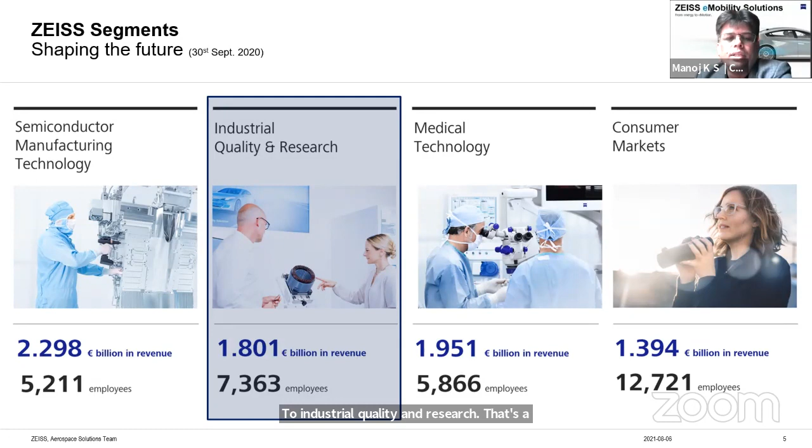We both, me and Hemanth, and this discussion belongs to industrial quality and research. That's the vertical we represent. So industry and quality, and also research. So these are the three topics.

Yeah Hemanth, would you like to comment on this? Basically, industry quality and research is the division where we belong to, and we are subsegmented into industry quality solutions, and then we have a research microscopy solution. So we belong to IQS, and here in industry quality solution, the product we handle basically belongs to contact and optical measurements. That's how we classify them.

Computer tomography, which is basically X-ray based. And once we do the measurement, we do a complete analysis, and also we manage the complete data. So this is the product line we handle from industry quality solutions. And from RMS, that is research microscopy solutions, we provide products like light microscopy, scanning microscopy, electron and ion microscopy, as well as X-ray microscopy. So these are the product lines the other division handles.

But from industry quality solutions, we have good connects with the industry. So some of the products like the light microscopes or the electron microscope, we also combine, and we sell as a complete package to the industry, right from CMM to the industrial microscopy solution. That's the product range we have.

Hemanth, would you like to share what all we do in this office? Yeah, of course, this office here is a building. We have a couple of production facilities. One is for IQS, where we manufacture CMMs, and we also have a production facility for consumer lenses. So all the optical shops in the market that you see with a Zeiss logo get their consumer lenses from this particular production facility. We supply to all of India as well as to the global market. The machines produced here from IQS, the CMM products, are for domestic use as well as export - we export to 23 countries from here. So this is a brief about the facility we have in Bangalore, and of course the headquarter function happens from Bangalore.

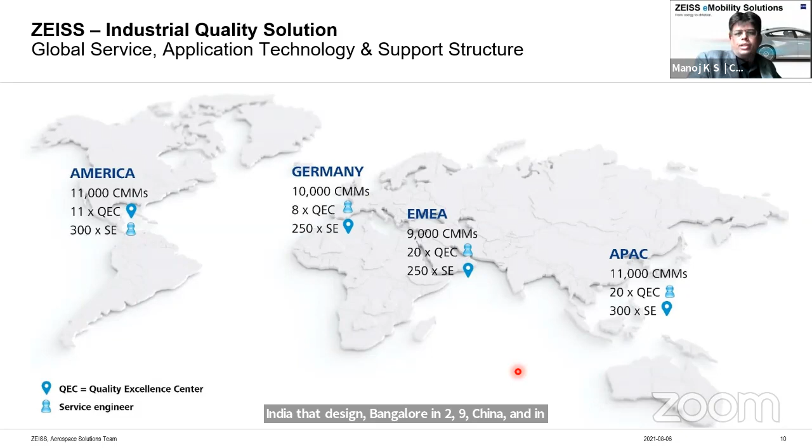Okay, so just a global view before we jump in - a few more minutes and we'll jump into the subject. Globally, we have more than 40,000 CMMs, for which we are quite famous around the world. And we have about 50 QECs - Quality Excellence Centers. We have 4 of them in India, in Bangalore, Pune, Chennai, and Coimbatore. The 5th one will be coming up in Delhi shortly, where customers can walk in and take services. Also, we have a good network of engineers - 300 service engineers to support the customers.

Now each of these industries have different problems. When you look at the electronics industry, the requirement is high volume. Whether it's USB sticks or mobile phones or chargers, they are all made at a huge volume catering to growth, so you need to be really fast - you have to have a high-speed measurement technique to qualify the products. Also there are complex micromechanical issues, because when you insert a USB charging point, the charging connector has to really sit properly. There are micromechanics inside which make it happen, which make it reliable. So those topics have to be taken care of.

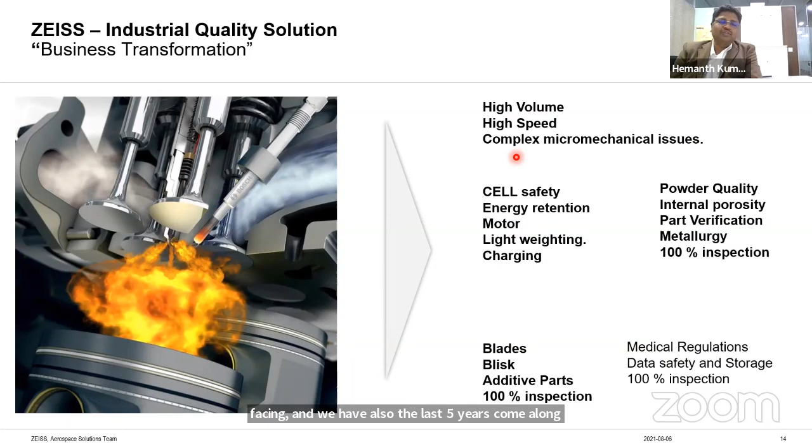Yeah, absolutely, I think there are different challenges now. If you see on the left side, we were only doing measurement of metal samples after the machine is done. But on the right side, we talk about small details like components from electronics data - they want to see minute details, and at a very high speed. The measurement challenges are significant in the sense that we all worked with metals, and now we move into electronics and lithium ions - how the lithium ion behaves, how it moves from anode to cathode, how much energy it can provide. So these are the various challenges the industry is facing now, and in the last 5 years we have come a long way in identifying such challenges and providing solutions for them. So that is what I think we will discuss today, right Manoj?

And the powder gets formed into an impeller or a rotating element. So that's what you see there. This is a new, upcoming manufacturing field called additive manufacturing. It is again a complex field which is coming up because when somebody wants to rapidly develop a concept or a component, it is easy to develop it in additive manufacturing. It's almost like cooking.

I don't want to get into details, but it's an upcoming field, very much useful in aerospace. Also, I'm told that when you're talking about cars which have personalization, additive technology will be used very much. Also in the EV industry, when a startup wants to make a few vehicles initially, he will not go the standard process of mold making, casting, machining. He would rather do the whole process in an additive way. So additive manufactured cars are available, running in prototype and experimental stages. Very, very interesting field, Anand.

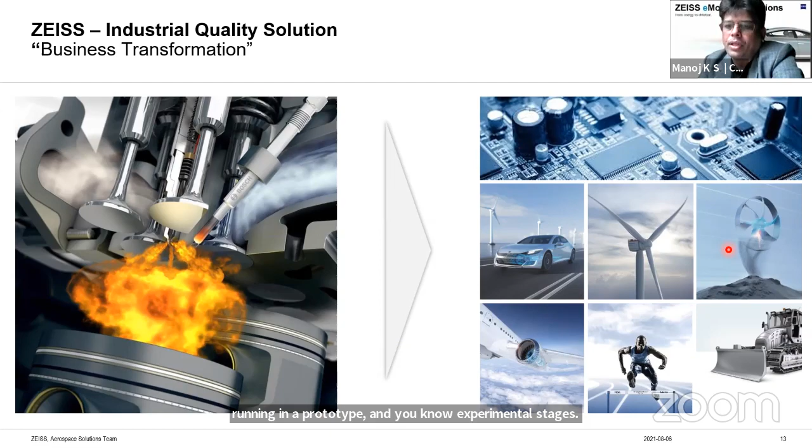These are the challenges around that field, which we address, but we will not get into that subject today: powder quality, porosity, part verification, metallurgical topics, and so on. Does that clarify, Anand? Absolutely. Yes. Okay, good. Thank you.

As we get into the subject, we must tell you that being a quality company, we look for trends. What would come up in the next 10 years, and then our R&D investments would go into different areas which would suit these trends. This is an analysis done by a body called VDI, and they have rolled out a manufacturing metrology roadmap. As you can see here, the four terminologies in the last column: fast, accurate, safe, and flexible.

Individually, if you look at fast separately, everybody always wanted fast measurements. But today the challenge is you want all of them together. You want the measurement to be fast, accurate, safe, and flexible to adapt to different changes which come up in the industry. About 8 to 10 parameters have been listed here. I think, Hemanth, we could discuss one or two.

How does this increasing integration, reducing measuring time, and automatic data processing connect to fast manufacturing metrology, Manoj?

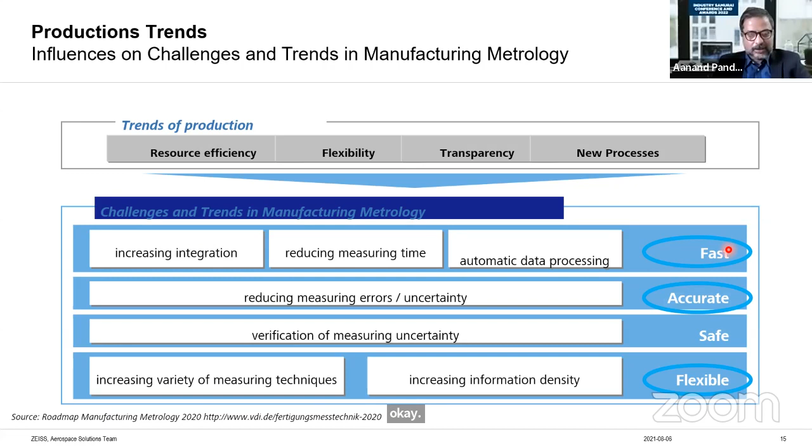The first question I had on this slide was about the second point, the accuracy part, which says reducing measuring errors or uncertainty. So what is the industry experience, Manoj, in terms of the percentage of errors without using this solution, and how much accuracy is improved by the solution?

I'll give a historical perspective. As you know, India became an auto component hub from 2002 onwards. We caught on to casting, machining, forging topics and moved fast. That was an era when Suzuki, German, Korean and Japanese companies inculcated the quality concept. If you look at industries, they talk about 100 ppm, 10 ppm, and so on. So there was always a bias towards reducing measuring errors and lowering uncertainty in the industry. We came in, and our business grew because we were one of the most...

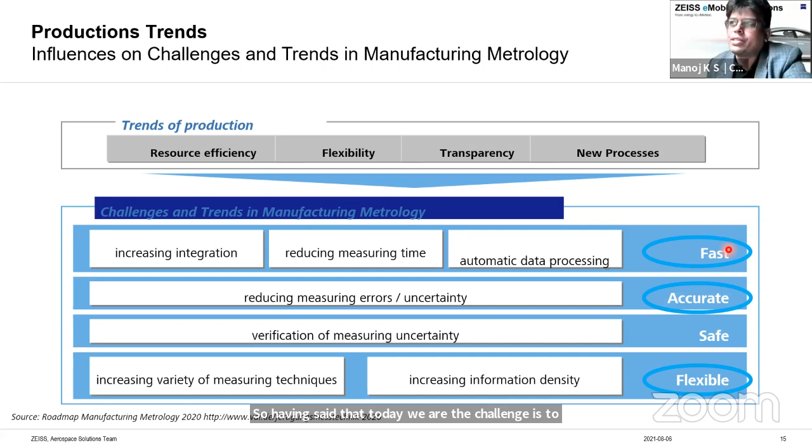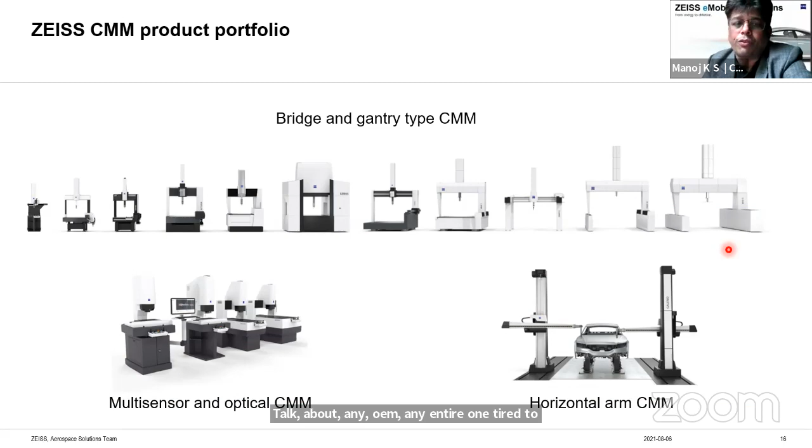Thanks. So I think we'll now jump directly to this slide, which we are quite famous for, the equipment we supply into the industry. Talk about any OEM, any tier 1, tier 2 in India, they have a plethora of these machines. Talking about new age industries, the electronics industry has a lot of micro issues starting from a few nanometers and so on. We'll discuss a little on this using microscopy solutions.

Also on the key topic which will change the paradigm shift in the industry, we'll talk a bit about the battery, lightweighting, car body, and so on in new energy vehicles. We can move on, Hemanth, or do you have any questions?

Yes, I have quite a few questions on this slide, so we could address those later during the discussion. Anand, do you have any question? Yeah, I have many questions on this. Okay, answering them could require some time, maybe we could take these up during the following discussion. Okay, perfect, so we should cover ground, let us move on.

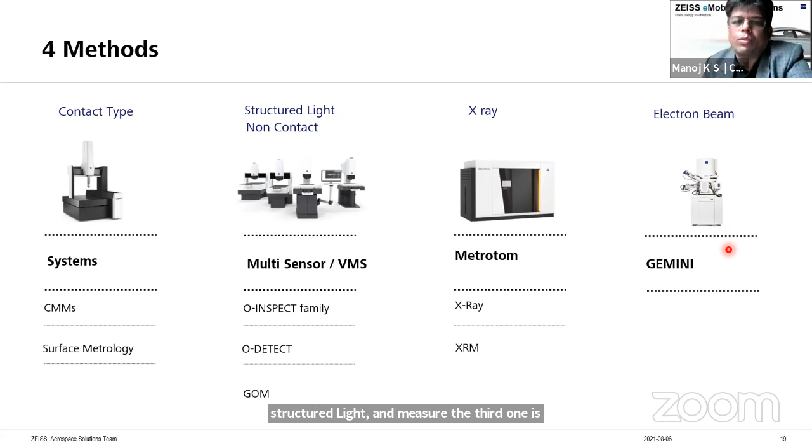Let me quickly tell you that as a measurement company, we have 4 methods of measurement: contact, touch and measure; see and measure; throw a structured light and measure; and the third one is X-ray, where you X-ray the component and look at everything inside. That's a topic we'll discuss in detail today with Hemanth, as we can measure anything from a few hundred microns.

If you have an issue, if you have a residue that's captured and you want to find out what it is, whether it's a metal or a polymer, or if there's an issue with it, we could measure anything from a few hundred microns to about 5 meters for its dimensions, and get a little bit of chemistry information too.

Now this is the most famous slide Hemanth is very familiar with. So Hemanth, please go on. Thanks, Manoj. So basically, on the X-ray product, we broadly classify X-ray into 4 groups.

On the top left side, you see a Metrotom, which is basically a high precision metrology and inspection tool. These Metrotom machines basically sit in a lab, and here with X-ray we focus more on the resolution aspect. In general, what we do with X-ray is place a component inside the machine, and the output you get is a virtual image of the part.

In that virtual image, it's a representation of how the part looks inside in 3D space. So the part can have porosity. If you want to see the porosity, you can measure it and classify it depending on the size. This is what we do on an X-ray machine. In high precision metrology and inspection Metrotom machine, we not only see the defect, we also do a measurement, just like how we do it on a CMM. The advantage is whatever you see from outside you can measure, and whatever you're not able to see from outside, inside also you can do a measurement.

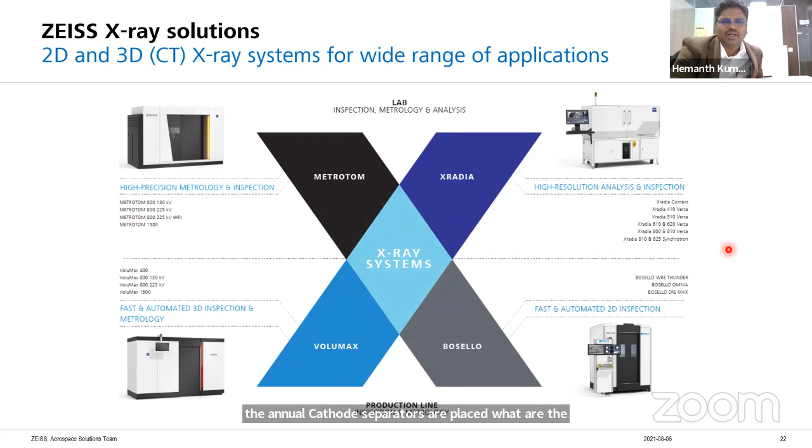Which means for the NEV, if you want to analyze the battery, inside the battery, without opening anything, you can see how the anode, cathode, separators are placed, what the gaps are, and if there are any defects, to a submicron resolution, you can visualize. So these are high precision metrology machines and high resolution machines on both left and right side. Just below that, you can see in a video now.

I will give one, both are lab machines, and the other machine you see at the bottom, VoluMax and Bosello machine. These are all shop floor capability machines, which can be placed on the shop floor for high speed inspection. Here the resolution we talk of is above 100 microns. So these are the broad classifications we have.

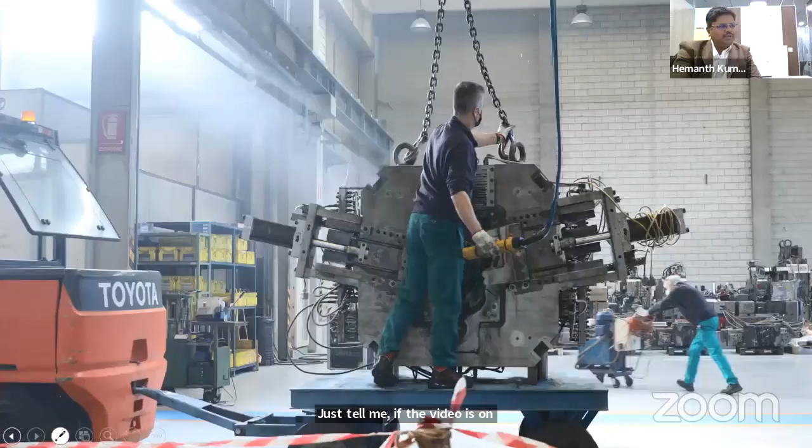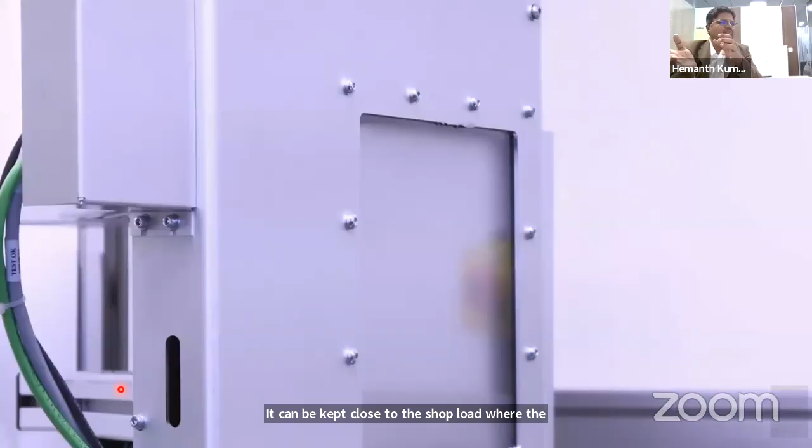Yeah, this is the shop floor machine. We call it an at-line machine. It can be kept close to the shop floor, wherein the part, as soon as it's cast from the casting machine, can be brought into this machine. Here you see the detector on the screen on the left side, and on the right side, this is the X-ray. We have a table coming out, and on top of the table you load the sample. Once the parts are loaded, this is the complete X-rayed image of the part.

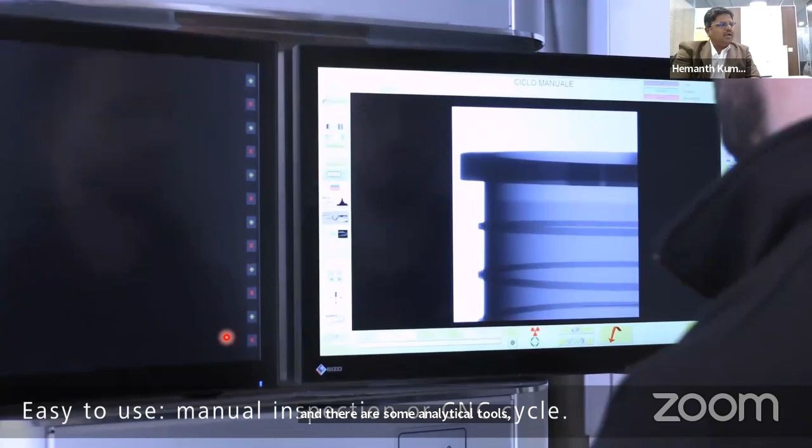So here it can show you some defect, and there are analytical tools wherein you will be able to check whether the part is good or bad, and whether the defect inside is allowable or over the limit. Manoj, the video is stuck. Yeah, now it's moving. So these are certain analytical tools.

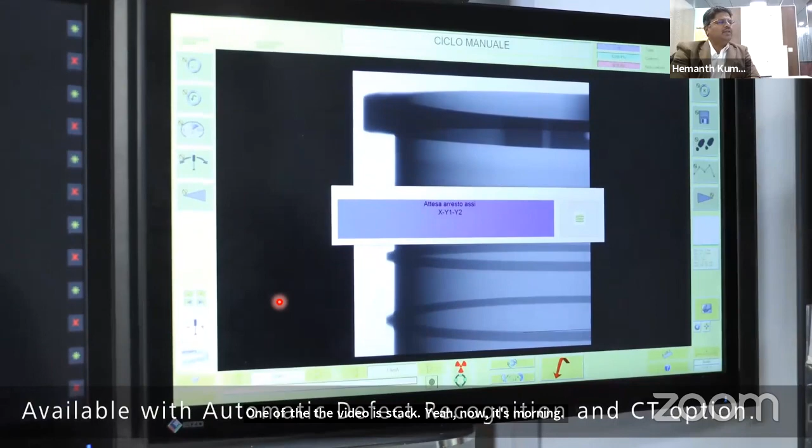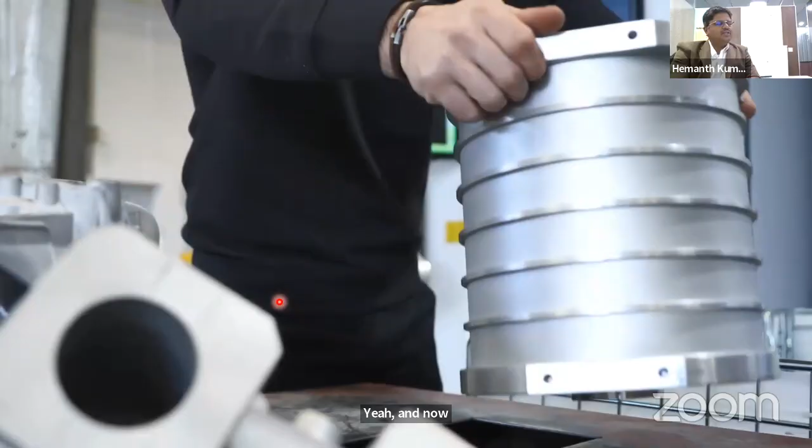Yeah, and once the parts are inspected, it is done. So this is how it is normally done on the production floor. The requirement of the industry now, because of EV, there are a lot of safety factors coming in, and more requirements for 100% inspection. So the machines you saw in the video are all used for 100% inspection of some of the critical components.

Good. So that component, what was there, Hemanth? Looked like a motor casing. Yeah, it's a motor casing, and the porosity in that casing is very important. Again, that goes into the EV vehicle, and they look at this porosity very critically. That's where we help our customers identify defects in those parts, and there are already a lot of users of our machine in this particular application. Right, so I may also add the component you saw was a motor stator.

You may think we have been making motors for many decades - what is the need to check an EV motor so stringently? The point is EV motors are now made of aluminum, not iron casting like a typical motor. The reason they moved to aluminum is all components in a car are dead weight except the passenger, whose transport is the basic purpose, not the heavy structures. So the designer's mind is on lightweighting - the motor casing is hollowed out in many places, keeping only the structure intact. So when you hollow out and thin it, you need to check and compare the integrity with the design model. That's the basic purpose of why X-ray is done.

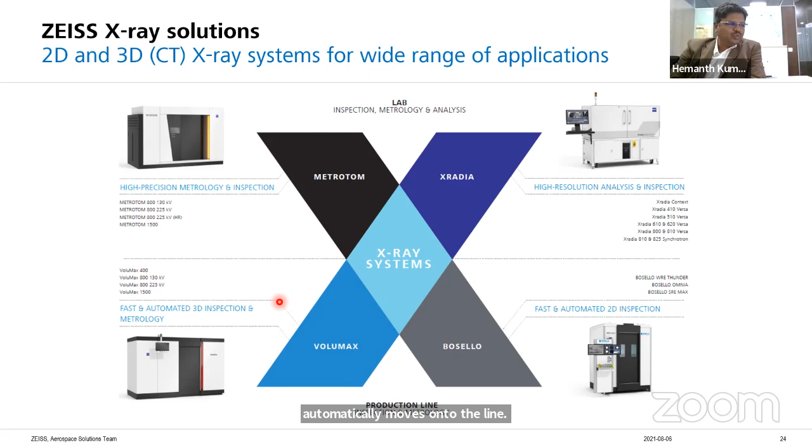I'll move on to the 3D topic. Basically, both in 2D and 3D we have automatic defect recognition software, which enables the operator to make the judgment faster. These machines are kept in serial, and all parts that come in get measured and automatically move onto the line. So this can be completely integrated into an automated line as well - this is how a few industries are using this machine.

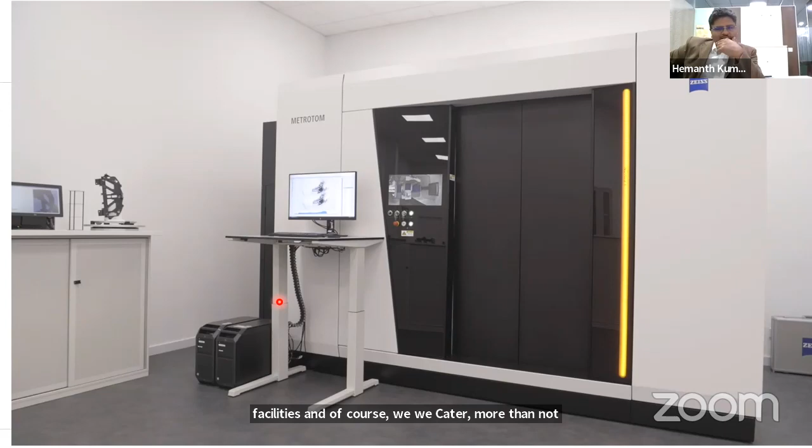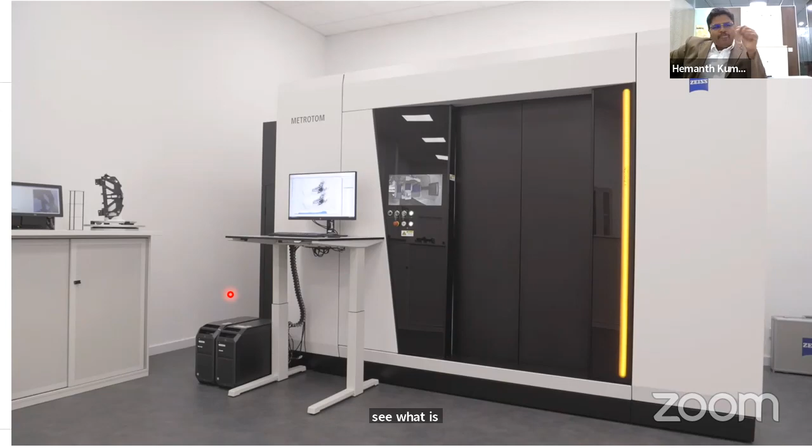Here's another video with different equipment. The previous video was a two-dimensional X-ray; this is a three-dimensional X-ray. Do we have this equipment in India, Hemanth? Of course, yes - in our Bangalore facility as well as in Pune, we have Metrotom and Volumax machines in both facilities. We cater to more than 1,000 customers who have come and visited our tech center and taken measurement services from these machines. The results for them are absolutely unbelievable, because all these days they could only see the features outside - now they can see what's inside the component, and the biggest advantage is the design-to-market time has reduced drastically because of this technology.

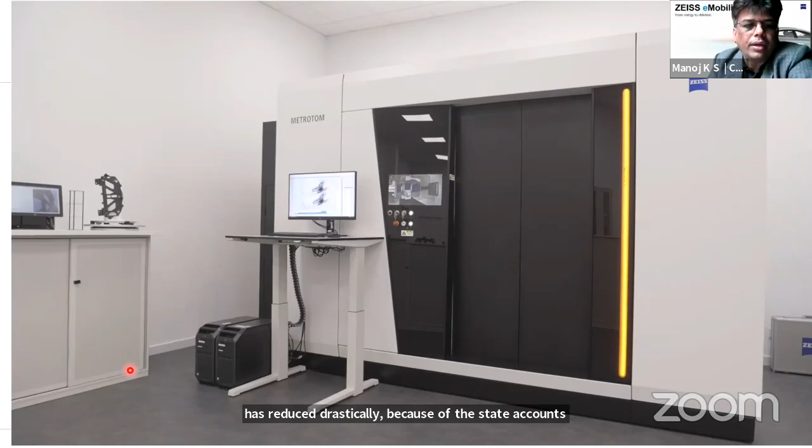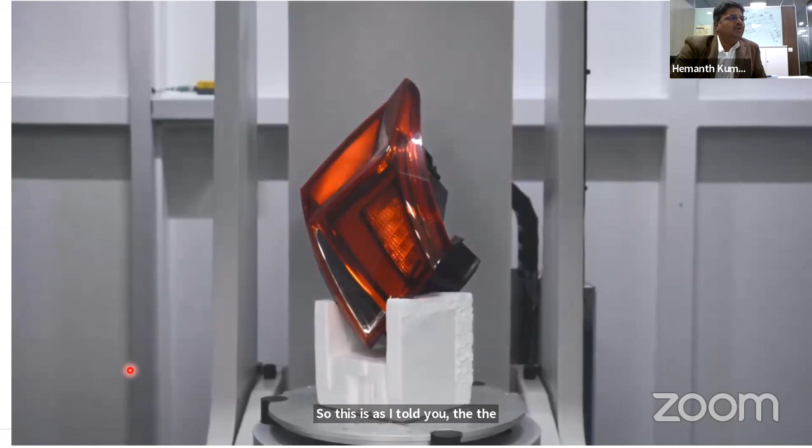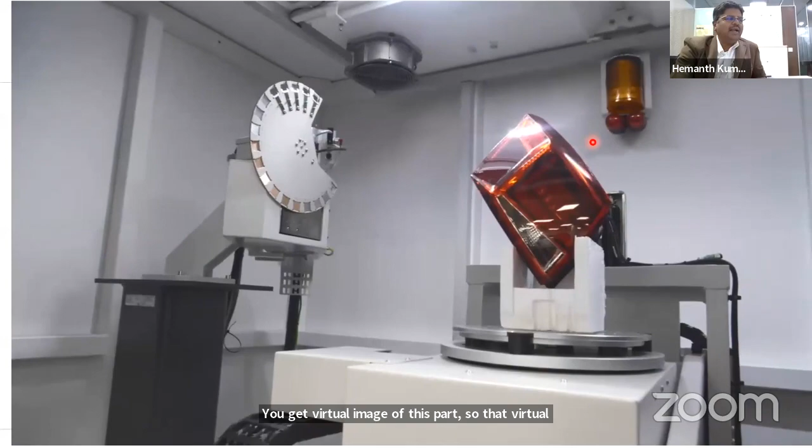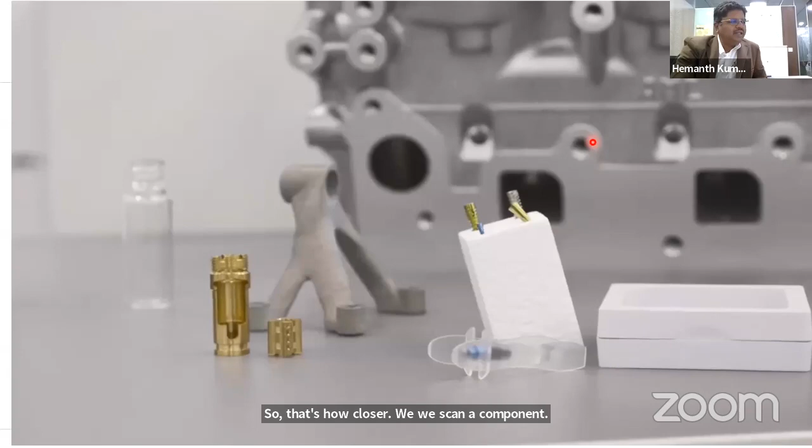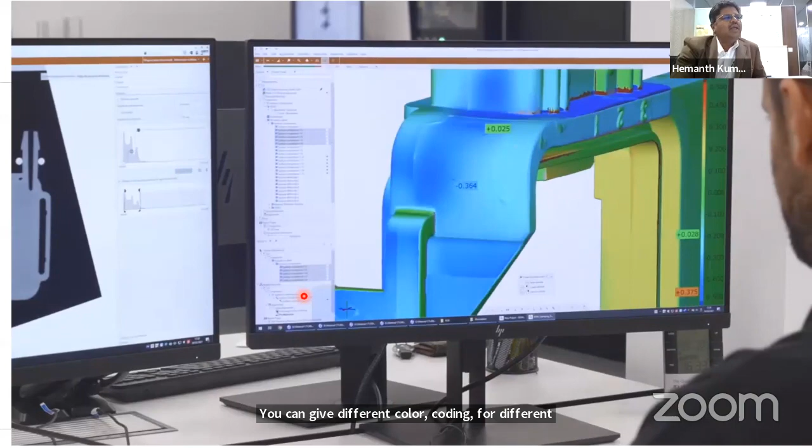It can be a plastic part with a lot of other materials, or an aluminum cylinder block or cylinder head application - this is how you visualize the image. After scanning, you can give different color coding for different materials, and do a virtual cut section to see how it's placed inside. If there are any gaps, you can do measurements with absolute precision, because we guarantee the accuracy of the machine just like we do on a CMM.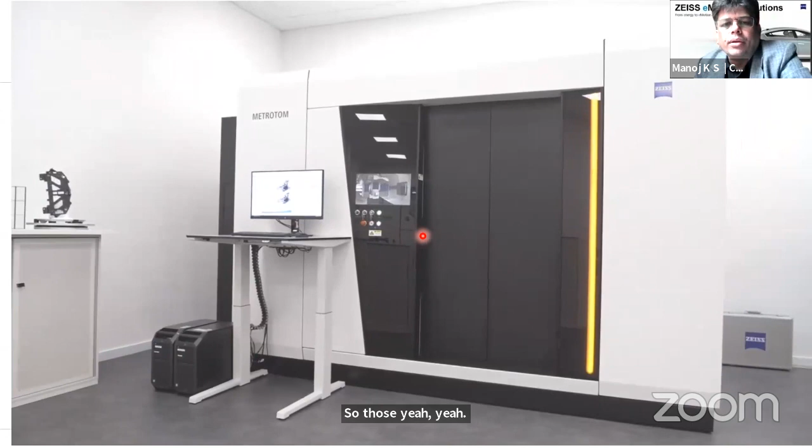I just thought of adding a point - if people would like to get their parts inspected, which are multi-material with multiple layers involved, and want to check the parts before sending them to your customer, you're welcome to talk to us and we could do this.

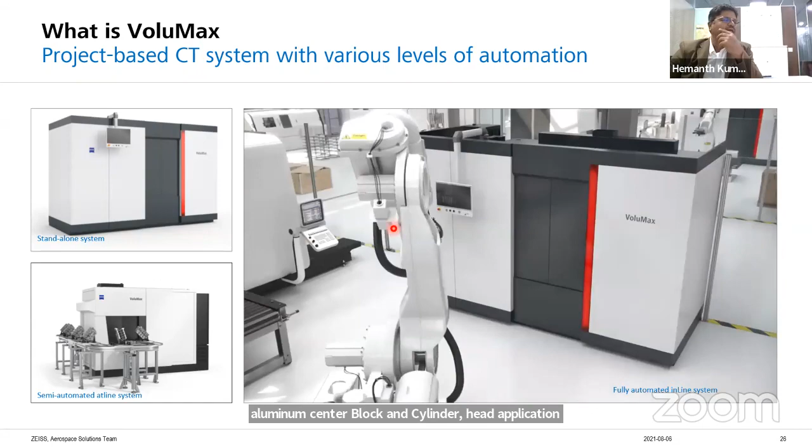This is another example of an inline machine. These machines are used predominantly in aluminum cylinder block and cylinder head applications, where generally the defect in these components comes out when you start doing the machining. By then, from the casting phase to the machining phase, you might have already spent a lot of money and energy on the component.

At the end of the cycle only, you'll be able to realize whether the part is good or bad. But in this particular layout, the component coming out of the casting machine goes inside an X-ray machine.

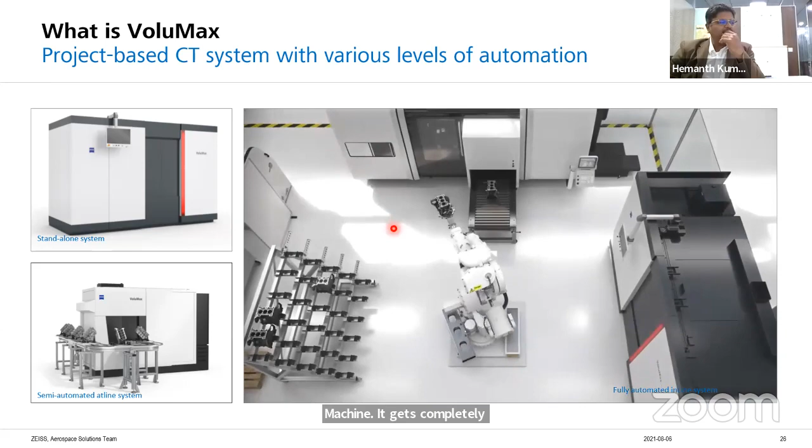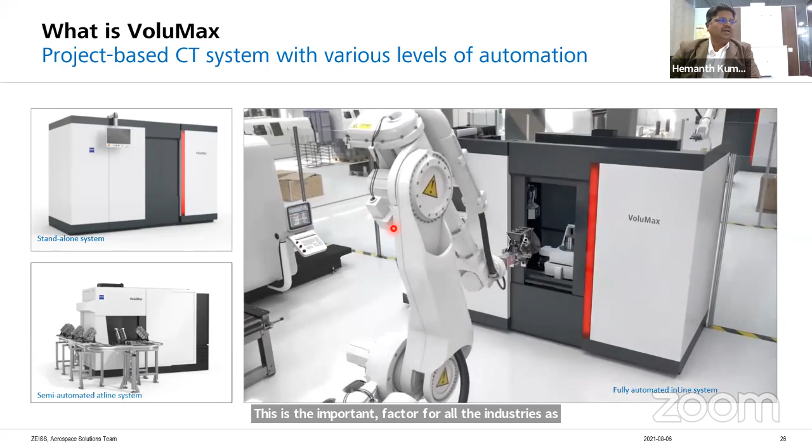So the advantage is only the good part goes to the next machining phase, and because of that you save a lot of energy and time. This is an important factor for all industries, and Volumax helps customers to a great extent.

So the names Metrotom and VoluMax are names for the functions, but they are basically 3D X-ray systems, and they vary in the location of measurement, the resolution, and so on.

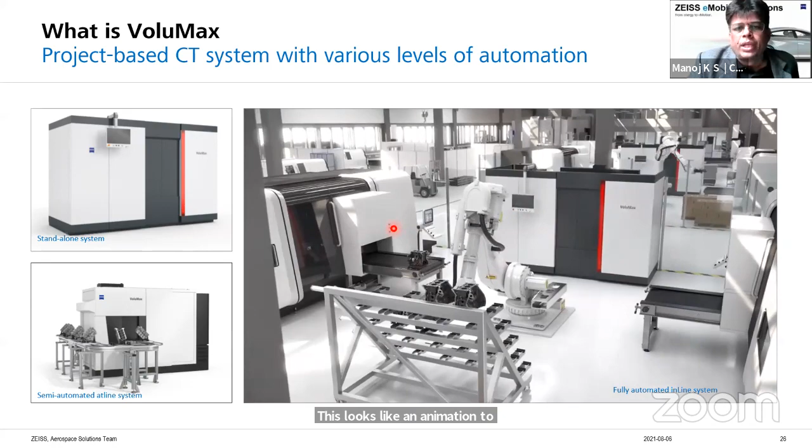This looks like an animation to the viewers, but actually this is a reality. This is happening in many companies around the world for different applications. I think Hyundai uses this technology, BMW uses it, Nemak - those are a few companies using this technology.

Yeah, I have a quick question before I miss out. Let's go past these slides. This is about the 3D X-ray solution. Now my question is that with 3D, we have obviously an extra degree of freedom, as they say.

Now for manufacturers, switching from 2D to 3D solution would, at least in India, require a lot of capital expenditure, particularly for an SME player. In what circumstances, or for what needs, should an SME business consider a 3D solution, and for what kind of requirements? What would be the typical requirement for which we should invest in 3D X-ray technology, from an SME point of view?

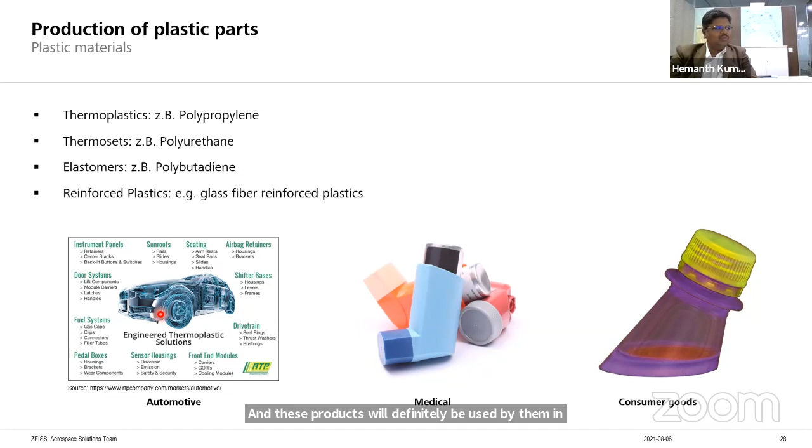For the interest of time, let me move on. As was explained in the videos, you can see that the one on the left is a safety belt latching mechanism used in the car. It's made of plastic for lightweighting and low cost. But you have to be careful to look at the pores and porosity, and how the shrinkage happens and so on.

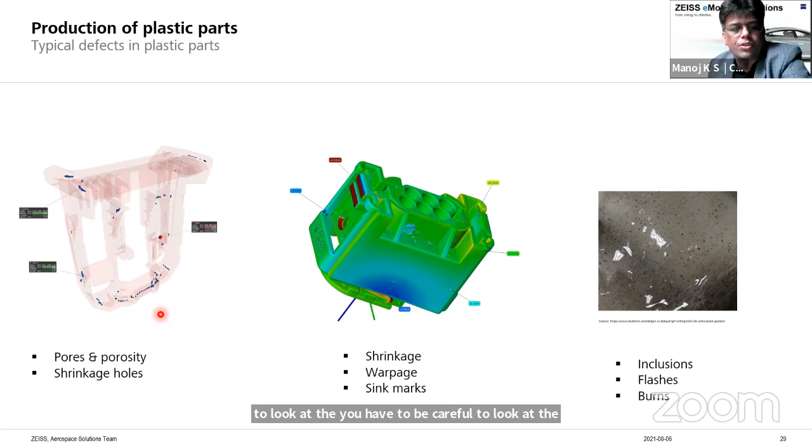Hemanth, other comments on the other topics? Yeah, basically, like all the measurement dimensions, you also have a tolerance band. For porosity too, you have a tolerance band. The blue color represents a certain size of defect, and the red ones are defects which are out of tolerance. That's how the representation of a component with porosity will be explained to the customer, and this same report goes to their OEM.

And in the middle, you see the overall superimposition of the CAD model over the measured virtual image. Here you see how much metal is poured, whether it exactly represents the perfect CAD model, or if there's any deviation. The blue ones are the places where there is less material, the red ones are the places where there is more material. Also, the shrinkage and warpage analysis can be done with this tool.

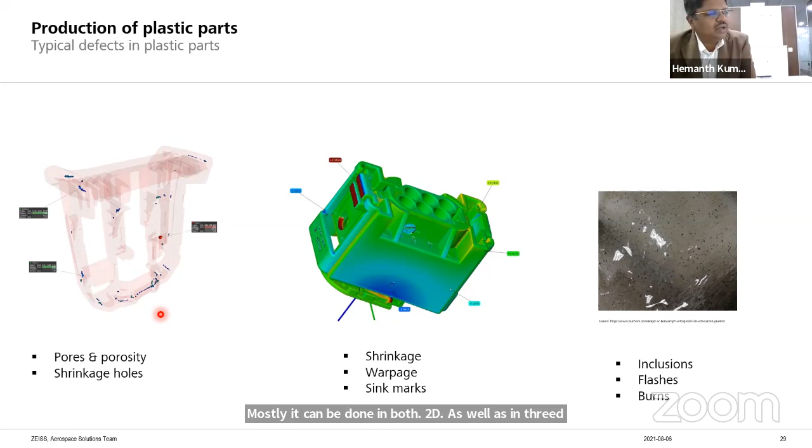And on the last part, you see some inclusions, flashes, burrs. Mostly it can be done in both 2D as well as 3D. All the software tools are available with us to do the complete analysis on the X-ray machine.

So this is, as we were mentioning Anand, about shortening the manufacturing process. From the requirement in research, you move to product and process development and production of the item. Then you have an initial sample test report, and then you go into serial production once a customer approves. So your question was very pertinent, Anand.

As you can see, computer tomography can be used to evaluate whether all the components fit together and are assembled in a non-destructive way. You can measure and see if things are right, non-destructively.

This is where we could support even a bottle and cap manufacturing industry to see if it fits in, because it is made in huge volumes and the timing is important, whether it's a new shape design or summer is approaching and you have to put millions of bottles in the market. So timing is quite important in these industries, and CT technology can really fasten your development of dies and molds.

Yeah, it completes the complete process chain. You can fit the machine where you want, and we have a solution for the complete process chain, right from research to serial production and assembly.

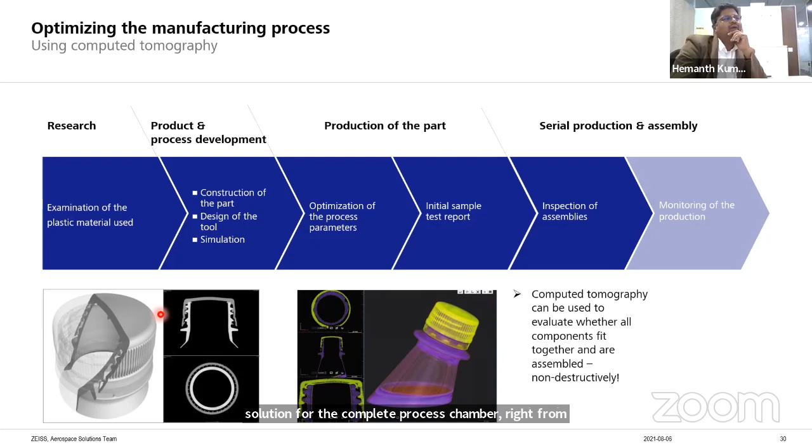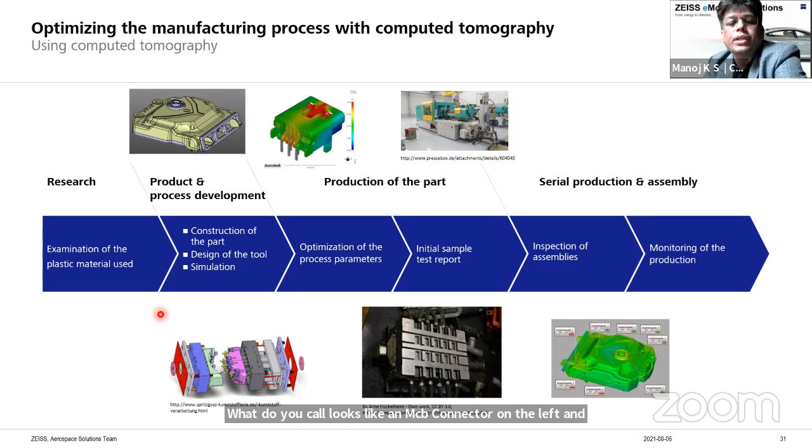Another example of a die and mold for a connector, a complex one, looks like an MCB connector on the left, and the tool and die on the right for the plastic part. So similar applications are possible. From the initial sample test report, you are able to go faster and give faster feedback.

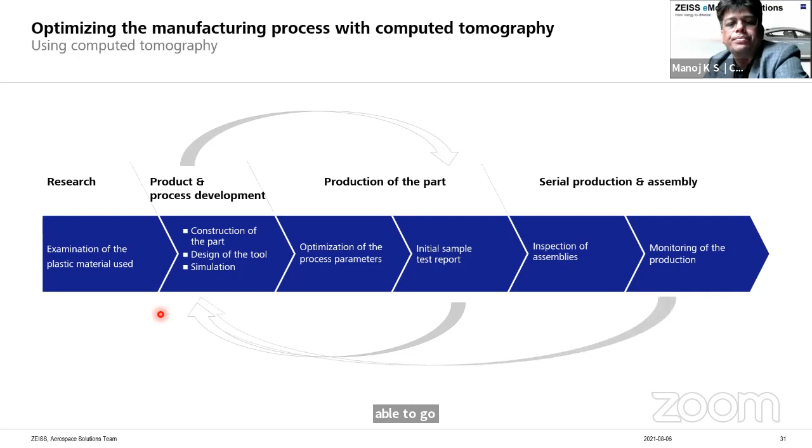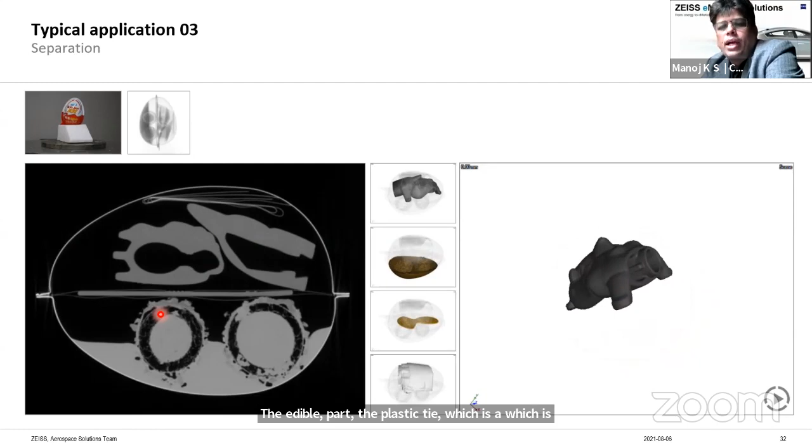Okay, this is just for the viewers to see how Kinder Joy, a common toy, a common candy that you buy for your kids, has been CT'd. You can see the various parts of it: the edible part, the plastic toy which is inside the Kinder Joy, and also the separator and the tool to eat the candy.

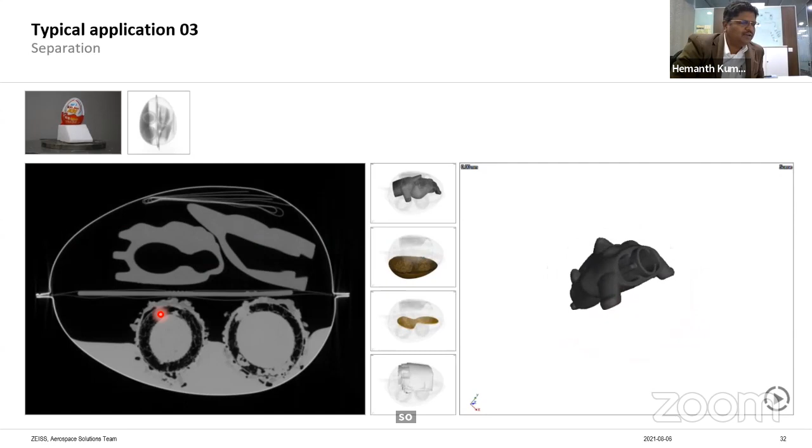Basically, what we represent here is that the chocolate has got different densities of parts. You have a very soft material, the chocolate. You have a plastic, and you have a paper inside. So everything can be scanned, and the representation is in different gray levels.

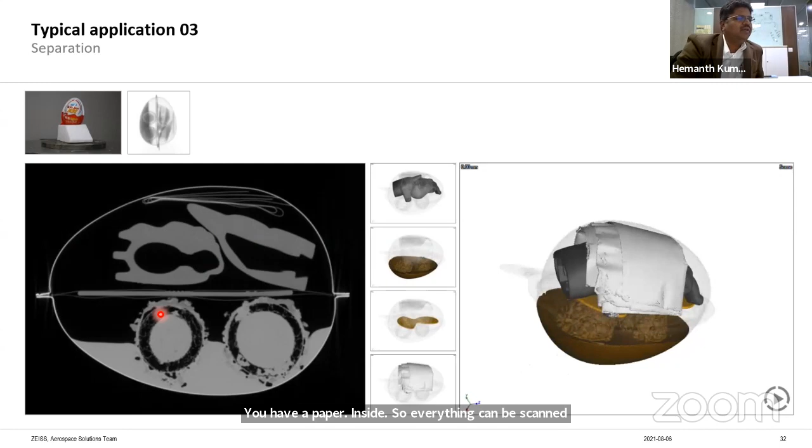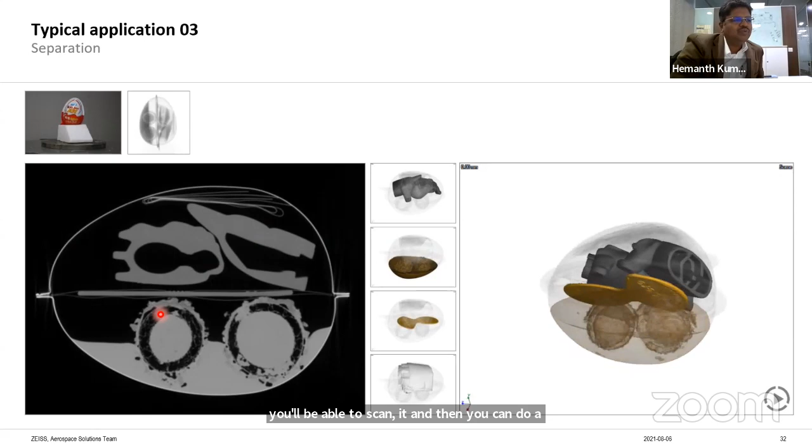The advantage is, even if you have multi-material, you'll be able to scan it and then do a segregation. Now you see only the toy which is visible because of different density, then you see the spoon, then the chocolate. So this kind of segmentation of assemblies can be done in a very easy fashion, and this gives a lot of visibility for the designer and for the manufacturer.

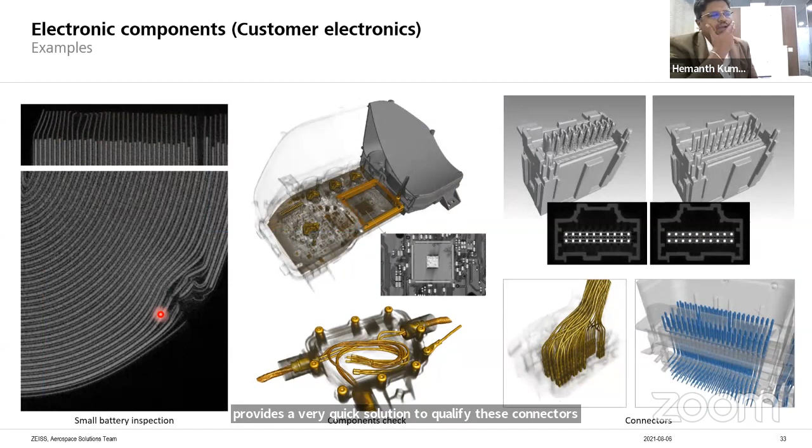Just go back, Manoj. The challenge is, you have a metal insert on a plastic. On the left side, you can see the metal pins are not clear, which means the edge definition is not good. So we have certain software tools wherein we correct these edges with a special tool, and on the right side you see a clear image. So these are the challenges which the industries will face.

But we do have a right solution to offer to customers wherein you'll be able to visualize the product or the part, which is very good for the measurement aspect.

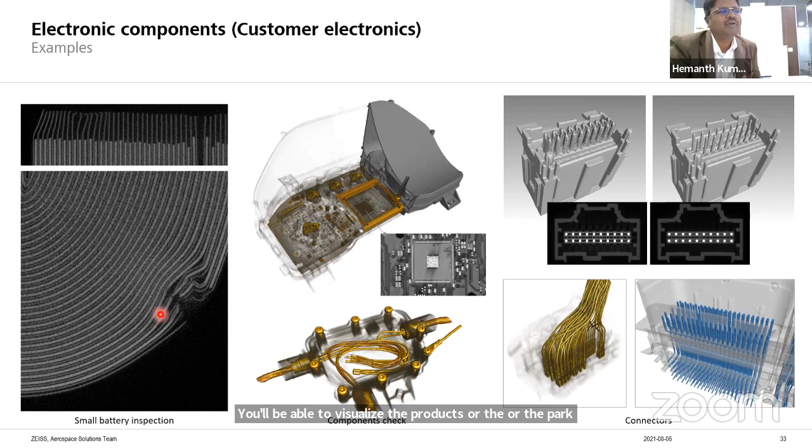Next slide. So this is again coming back to the EV. You see the motor on the left top, and the motor has the copper hairpins which are getting welded. What you see on the second image is the welding, and there is one welding in the middle which has a huge porosity, a black color porosity, what you can see. So when there is porosity, there is less current flow because there is higher resistance since the two metal bodies have not welded together.

So if there is current flow, then more heat is generated and there's a loss. This can be visualized in the bottom. You can see all the weld areas separately in a CT. Thereby you can qualify if the tolerances of porosity are being met or not, and what is the volume, what is the void level, what is the size of the void, and what is the morphology, whether it is oval, what is the shape of the void, and the volume inside the void can be calculated.

On the right, what you see is the battery, and the layer below, the black and white gray area, is basically the anode cathode layers. So you could look for defects and visualize, and the battery engineer would be able to see things that normally he would not have seen once it is assembled.

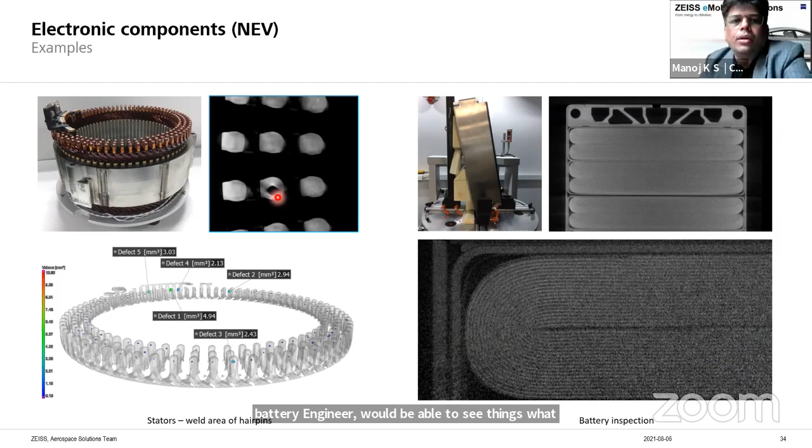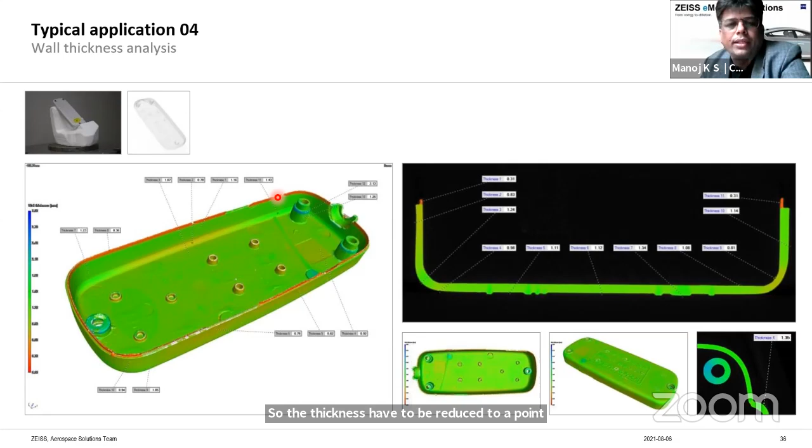Moving on, I think we covered this, the bottle cap example. Also, wall thickness is another common area, which again comes to the point of using less material concerning an environmental topic. So the thickness has to be reduced to a point where it functions but does not fail. So you want to look at wall thickness in the hidden areas, under the latching mechanisms. That can be visualized very nicely.

Anything from your side, Hemanth? Actually, the current process takes a lot of time. If you have to check the wall thickness across different sections, the current process takes a lot of time. But here in a CT, the advantage is once you have the scan, you go to a particular area, click a button, and then you have the entire details in few seconds. So that's the speed at which computed tomography works.

Okay, so summary slide.

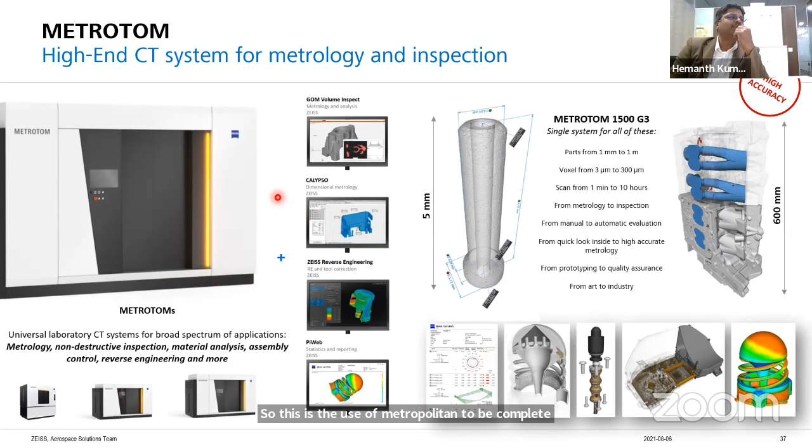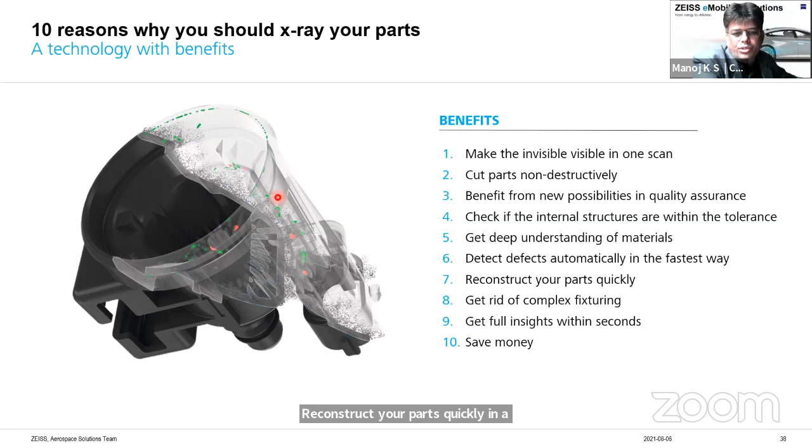So, summary slide - 10 points, if not more. First, save money - I would put that as the first point to the industry. Second, make the invisible visible. Don't have to cut parts. Get a deep understanding of what goes on inside your components. Reconstruct your parts quickly in a simulated way. It's complex, but you don't need any fixturing for Metrotom - just put the part inside and start the measurement, getting full insights if not within seconds, at least within a day. So that's the advantage I would say.

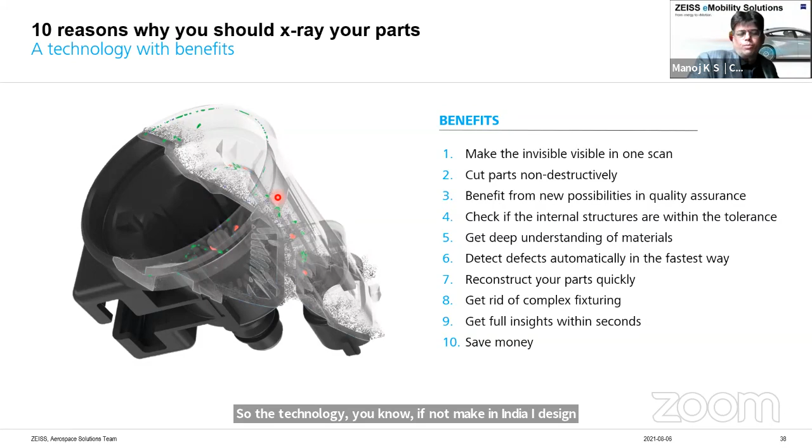So the technology, if not made in India, is available in India. Please make use of it. Talk to us. Now we'll move on, we have maybe another 5-10 minutes, so we'll move to another topic related to the battery.

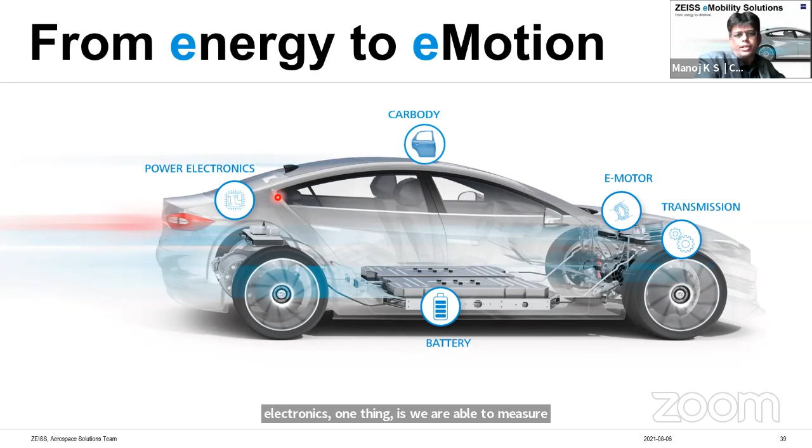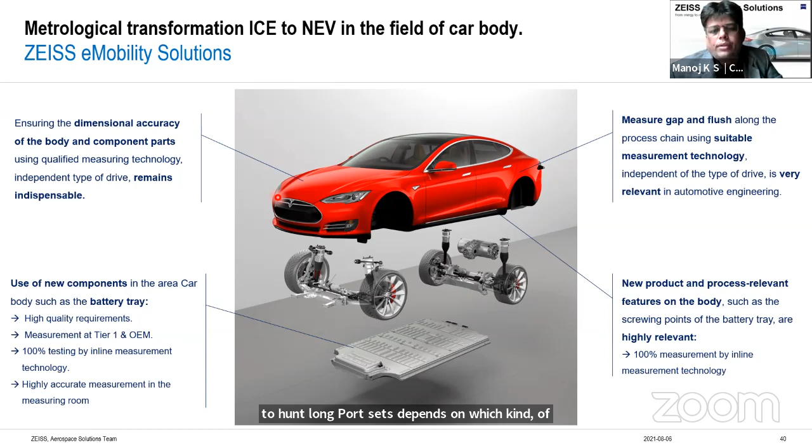As you see here, there is a new energy vehicle where you have a battery tray at the bottom, electric motors, transmission, car body, and power electronics. We are able to measure everything around it, from power electronics to the transmission - any topic concerning dimensions. If you break it open, the battery tray is at the bottom of the vehicle, generally covering the length between the wheels, and would contain about 3,500 to 4,500 individual cylindrical cells, or about 80 to 100 long pouch cells, depending on which technology the manufacturer uses. But the requirements of the battery tray remain similar.

If you look at the process by which a battery tray is made, there is a welding process by which the tray is formed. Then you need reasonable accuracy, so you do milling and drilling of the different holes and locators. Then you move on to full field inspection, because during welding, things would have warped, and you'd like to see at which stage the warping happened. Coming to critical function control, a question might come to mind - isn't a battery tray just a tray, like a coffee tray?

Probably - but actually I can see Hemanth laughing.

Actually, this battery tray is quite a complex item, because the energy dissipated in the batteries is the most important factor for safety - dissipation of energy generated during the charging and discharging cycle of the cells. So the tray has to have a cooling mechanism, almost like a radiator - it's a combination of a battery tray and a radiator, to take the heat away and be very rugged in the event of a crash. It serves multiple functions: keeping the batteries safe and dissipating heat. There are many factors involved, so the battery tray requires a lot of measurements, including X-ray measurements for structural analysis of the weld joints, made in a CT.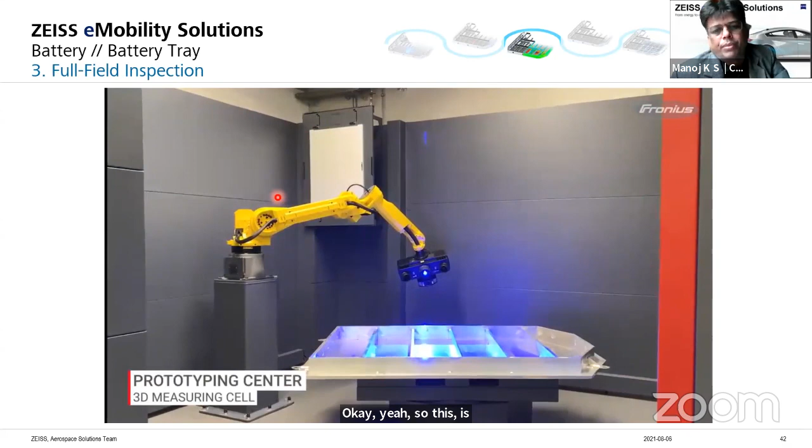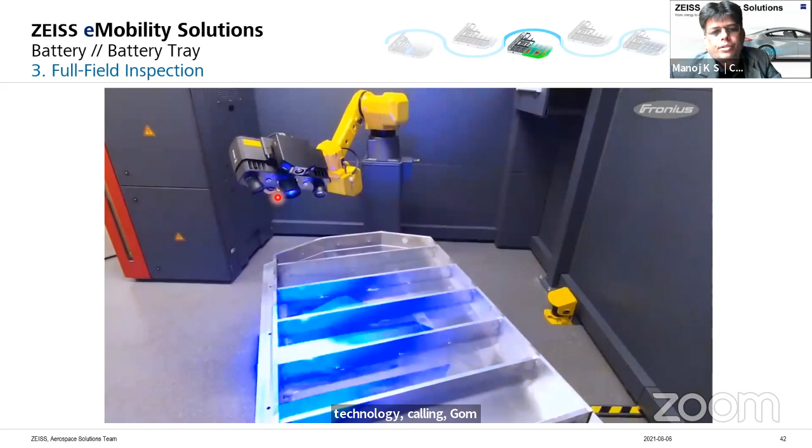No comments, we're running short of time. So here's a short video. In this case, it's a prototype battery tray being measured using another technology called GOM 3D structured light measurement, by which we can measure the tray, collect the information, and provide details regarding dimensional integrity and warping.

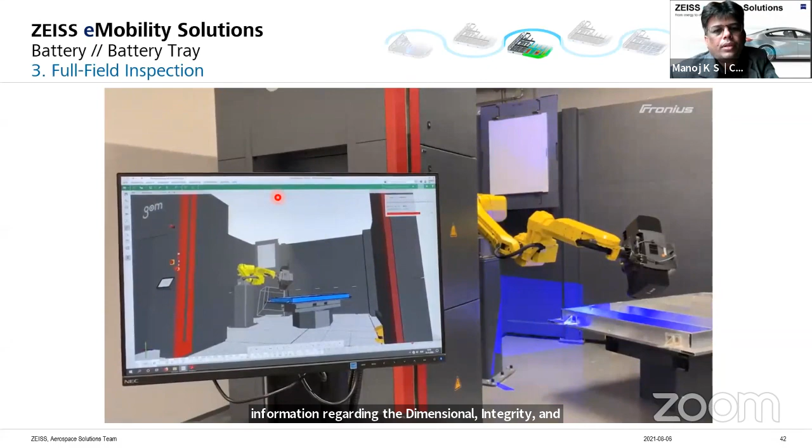Coming to the car again, if you look at a car in future, in about 7 to 10 years from now, when you buy the next car, you'll be paying more for the electronics, the PCBs, the control units, ADAS systems, and so on. So there are a lot of topics around these cameras and electronics which is used, like failure analysis, visual inspection, optical measurement, and so on.

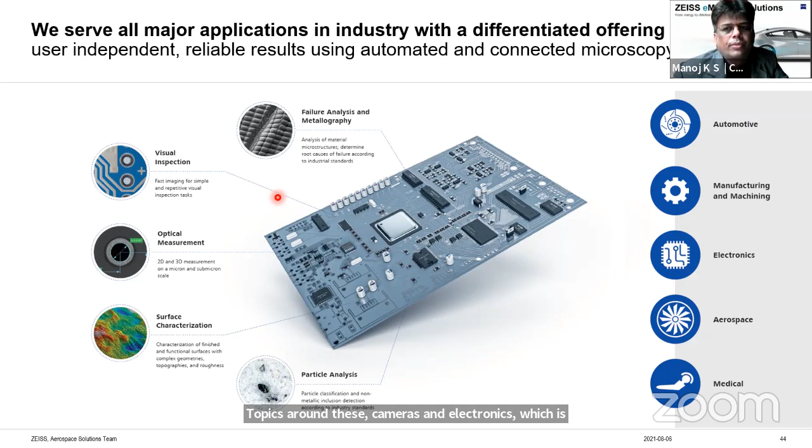So let's look at some solutions being offered using microscopy in these areas. You see the center is a car. There are sheet metals used in various areas. Lightweighting is happening. Aluminum sheet paintable bodies are used. A lot of plastics will be used, formed plastic.

This plastic should reduce the NVH quotient of an EV vehicle. As you all know, the IC engine was very good at generating a lot of noise, so we didn't bother much about the noise from the other parts. But as the IC engine doesn't exist, the motor is a very silent mechanism, so you have to be careful about forming the plastics, aluminum and sheet metals in a nice way that they don't start rattling in a few years. This is going to be a key topic for the EV car maker.

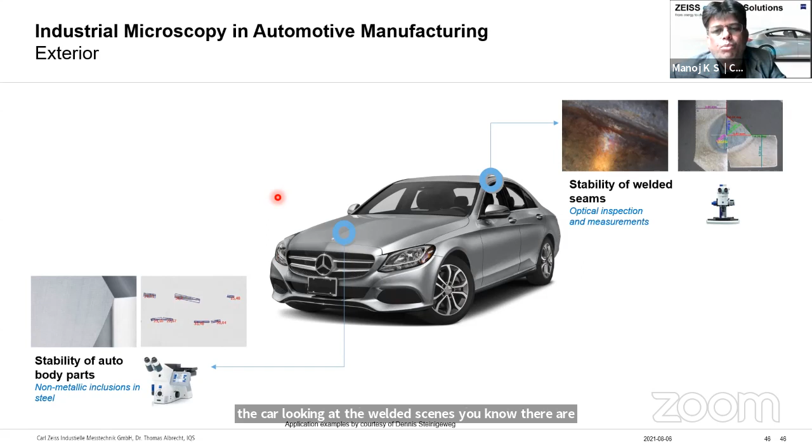So these are the areas where we are involved. Some examples are shown here, starting with using microscopes for finding out the inclusions in the steel used in the car. Looking at the welded seams, there are a lot of welds around the car body, and these welded seams can be inspected using optical measurements to look at the quality of the weld.

Coatings, a lot of coatings to make the car look good. So the thickness, surface structure of coatings, the kind of surface finish which will give a nice reflection to the high-end car - there is a surface finish quotient involved here, and that can be measured.

Extruded parts like wipers also carry a very nice definition of the contact area. So this can be seen using digital microscopes.

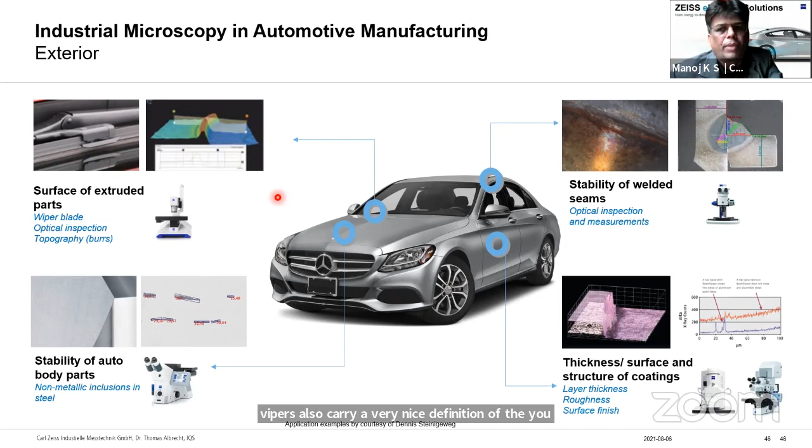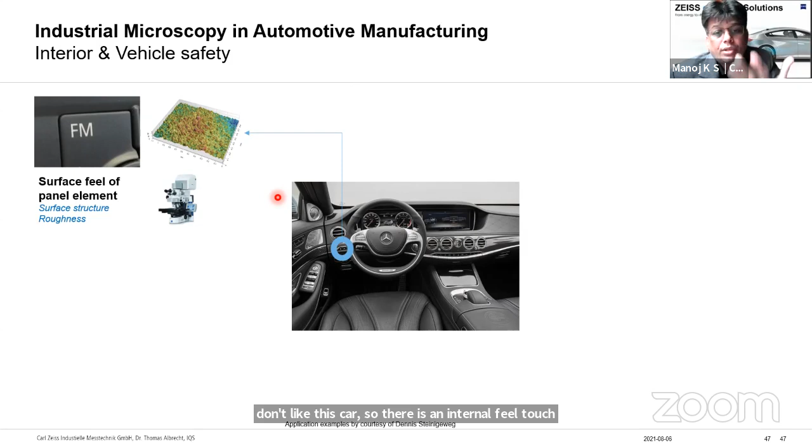Moving on to the interior of the car, what you look for is a surface feel. The kid would sit in the car and say, no, I don't like this car. So there is an internal feel, touch and feel of the upholstery, touch and feel of the dashboards. They can be measured and quantified using our equipment.

Including a very key safety topic: when you have an airbag, you have micro weldings done around the airbag locations, and they have to work. So you must inspect these laser shot weldings to see that they have the right structure so that they will get released in the event of a crash.

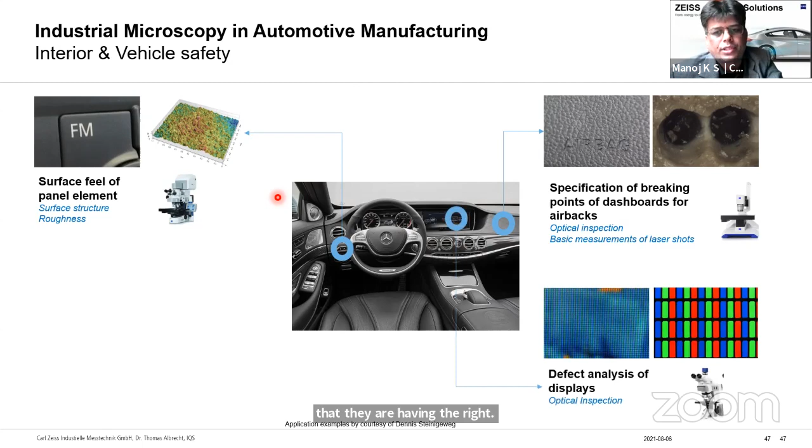Display issues and defects on plastic components can be seen. Again, for the IC engine - let's all be clear that the IC engine is going to stay for at least about 1.5 to 2 decades, let's not bid adieu to it. And there are topics around component cleanliness, oxygen sensors, spark plugs, issues in ceramics, and so on.

So this is one area of our involvement, our solution space, which is not very well known - the microscopy topics. So we would like our customers to get back to us.

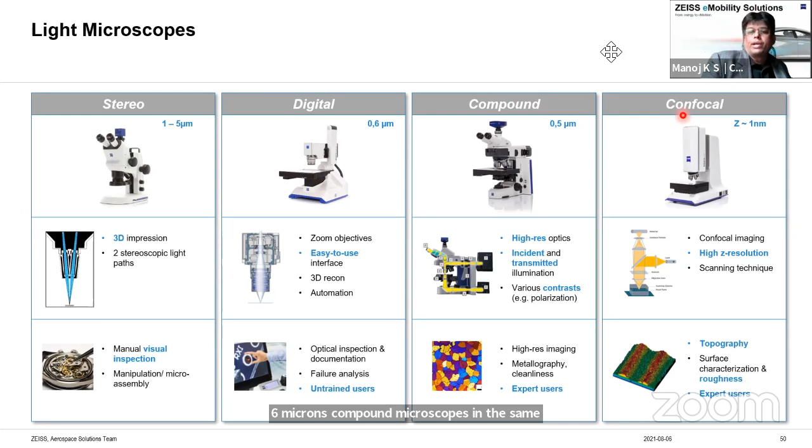A kind of product line, if we have to show - we showed you the CT product line. This is the microscopy product line, starting with stereo, digital microscopes, compound microscopes, and confocal systems. They work at varied resolutions. If you talk about stereo, it works at about 1 to 5 microns. Digital works at about 0.6 microns. Compound microscopes in the same area, and 1 nanometer could be achieved using a confocal technique.

Still further, this is not good enough if you talk about failure analysis in the industry. So we have X-ray microscopes and electron microscopes where you can do a lot of material and failure analysis at the nanometric scale. Again, these equipments are available at our offices in Bangalore. We would like the industry to take advantage of it - come, walk in and do a pay-per-use service.

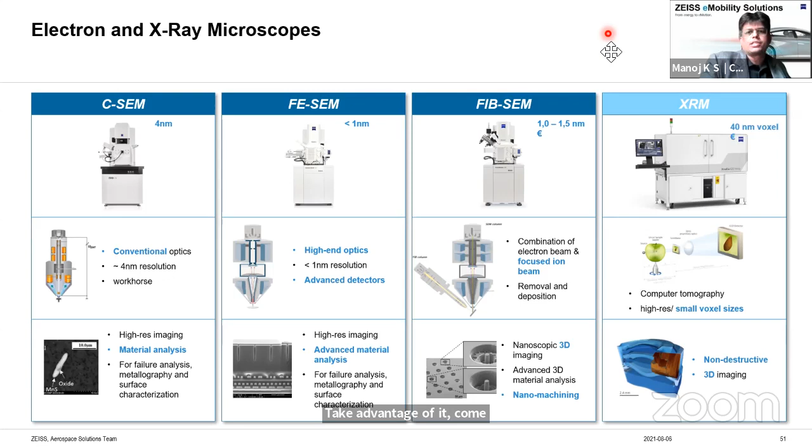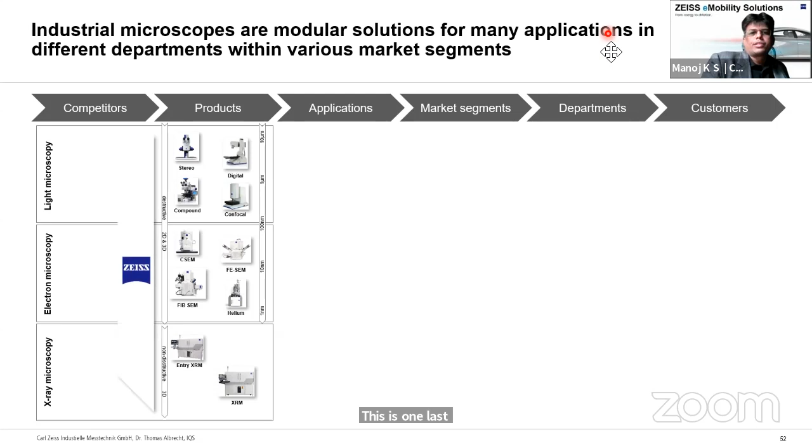With this, almost we are at the end of the spectrum. This is one last page which I would like to share. We talk about products, applications, market segments, different departments in the company, and finally our customers. So our customers are into, starting from the right, the R&D units of the company, quality labs, metrology labs, incoming inspection, and production.

The market segments could be automotive, aerospace, manufacturing, electronics, medical, and windmill. Just to give you a link, if you have a digital microscope and want to inspect PCBs, it could be the production guy who wants to do that, we have a solution. If a failed part has come back into the company and you want to inspect the electronics failures, it could be the R&D guy doing this, and we have a solution space for it.

Our solutions have different softwares to do the same job. If you want to look at failure analysis in deep detail, we have different equipment for it. If you want to look at technical cleanliness in your automotive IC engine process, we have a solution space. So we are industry agnostic, and could provide solutions to a variety of industries. Hemanth, any last comments from you?

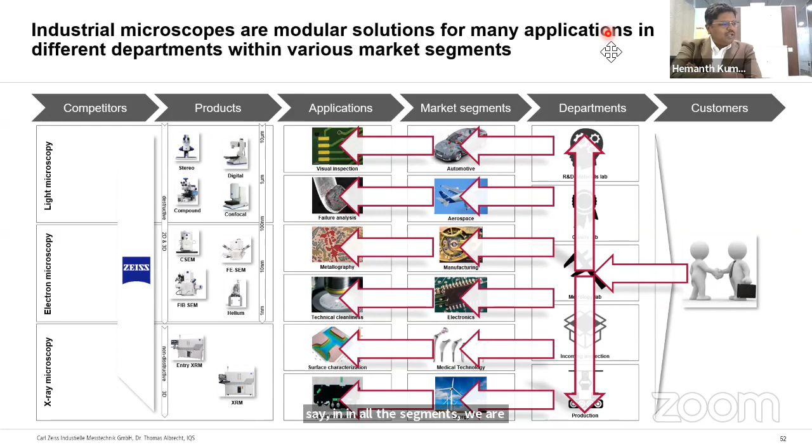Yeah, I think we have shown the complete product lines from both X-ray and microscopy, with different applications and different segments. But in all these segments we are there, supporting our customers through our various Quality Excellence Centers. There are product experts available who provide solutions for their challenges, and that's how we are trying to help our industries move forward. So I would like to request listeners that if you have any such challenges, be it measurement or analysis topics, please approach us, we are there to support.

Right. Yes. So, Mr. Anand, or listeners, if they have any questions, I think we are there to answer.

Absolutely. Thank you so much, Manoj and Hemanth, for that very, very informative presentation. I was like a child in a toy store, and I'm sure that's how our viewers also feel, because we hear a lot about Zeiss and its technologies, innovations and inventions over the years. But this is the first time we got a deep dive into the many solutions your company has been providing, whether it reaches us from diagnostics, from medical to the movies. So it's quite an experience. The time flew past the last one hour, and I thank you once again for these insights.